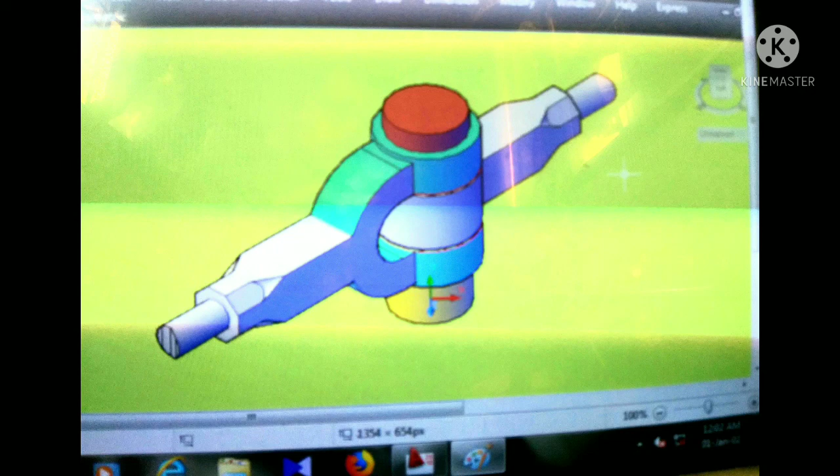Today we discuss how to design a knuckle joint. First, we will learn the shape of a knuckle joint and its uses, then we discuss how to design it.

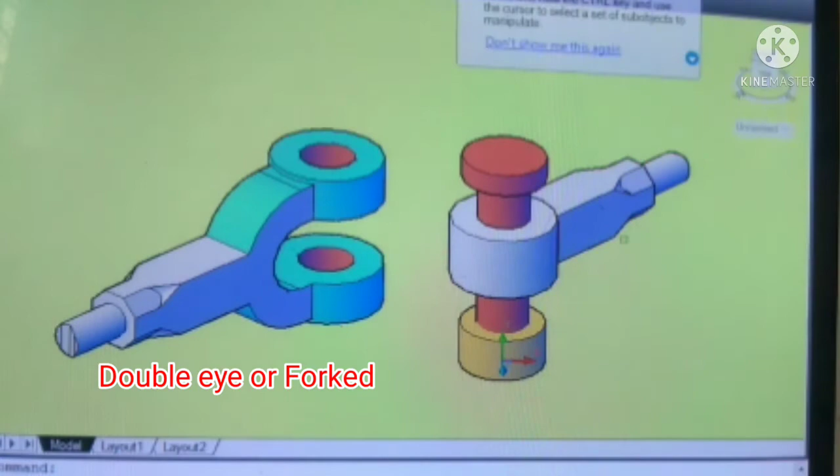Here are the different parts of a knuckle joint, and first we will study the parts individually. There are three main parts of a knuckle joint. This part is called double eye or forked, number two is called single eye or rod, and the rest part is the knuckle pin. The knuckle pin is attached with a collar called the knuckle pin collar.

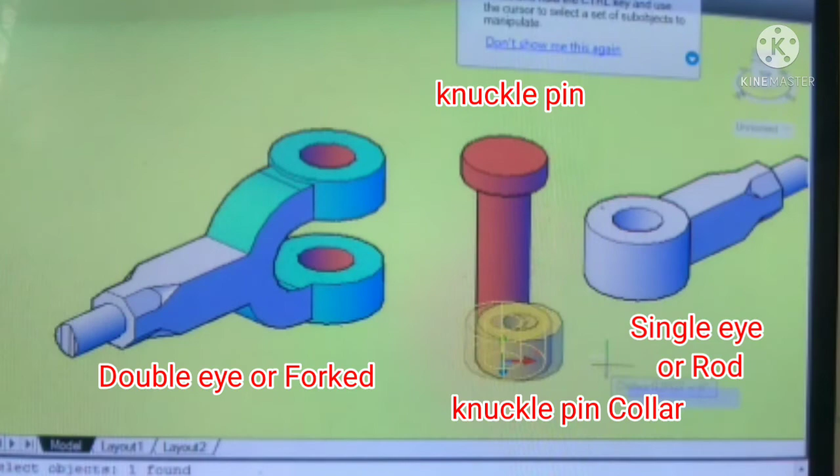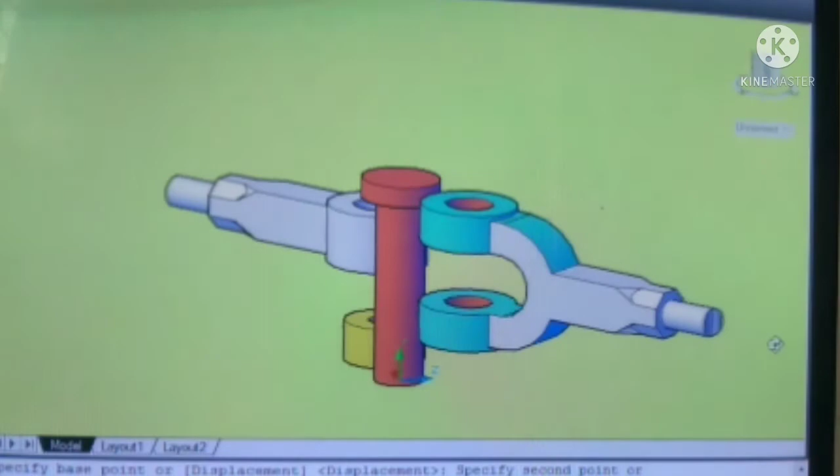Now we will look at the different parts from different angles, and again we assemble them together.

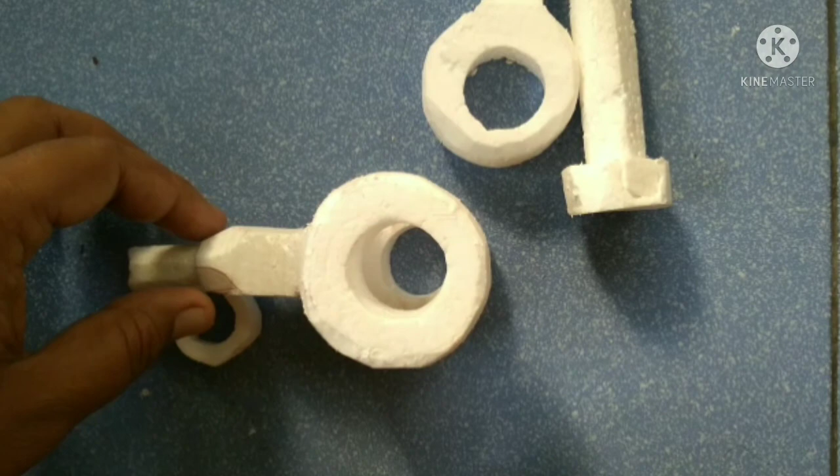Here I have made a model of a knuckle joint with thermocol for better understanding. This is the double eye or forked part, and this is the single eye or rod.

The single eye is inserted between the double eye so that all three holes are concentric, and the knuckle pin is used to secure the components. The knuckle pin collar is used to fix the joint.

Here we see the parts rotate in only one direction or one plane while transmitting tensile loads. Actually, a knuckle joint is a type of pin joint that is used to transmit tension loads while allowing rotation in only one plane.

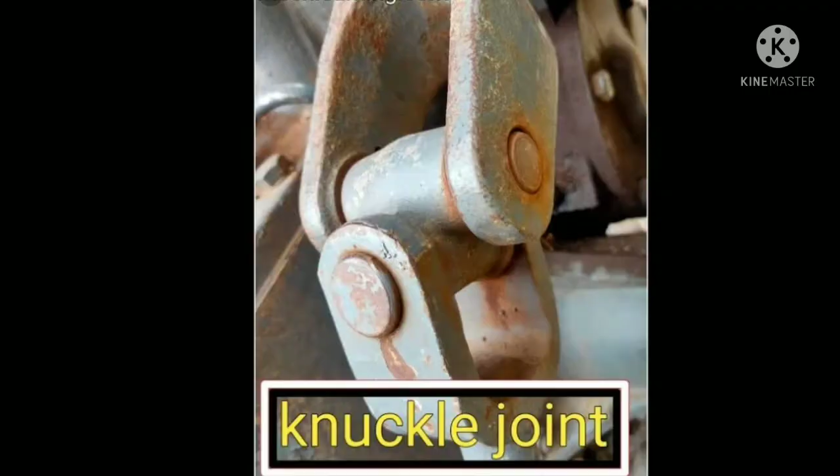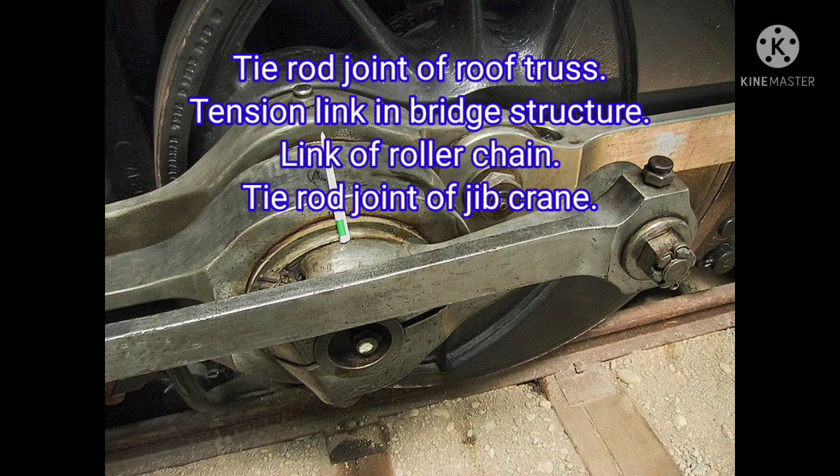Knuckle joints are often used to connect rods subjected to tension in structures, such as tie rod joints of roof truss, tension links in bridge structures, links of roller chain, rod joints of jib crane, and most commonly used in knuckle joints in tractors and connecting rods between locomotive wheels.

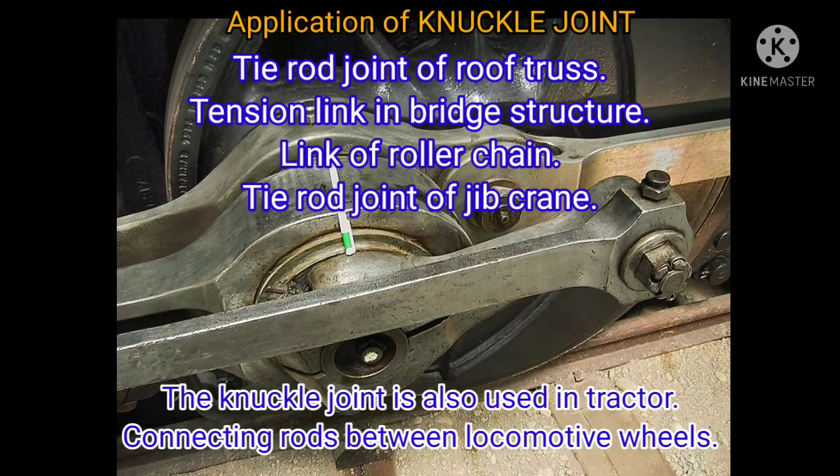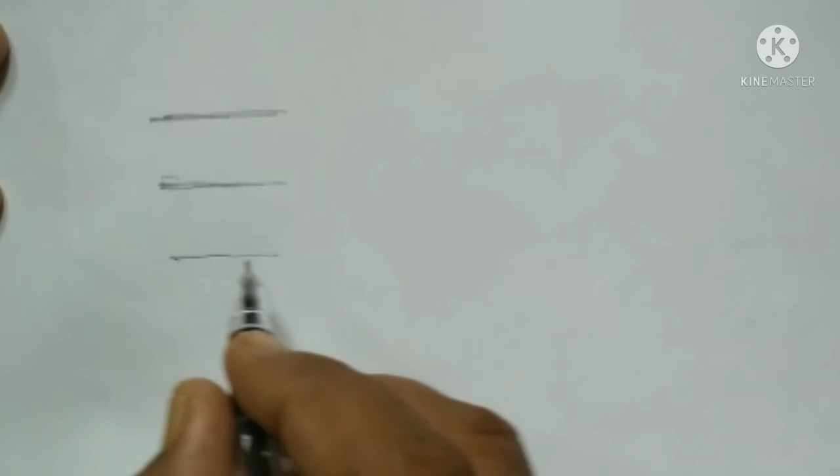We will go directly to the design part. First, we will draw a freehand sketch of the knuckle joint. By dividing into three equal distances roughly, we will draw three horizontal lines.

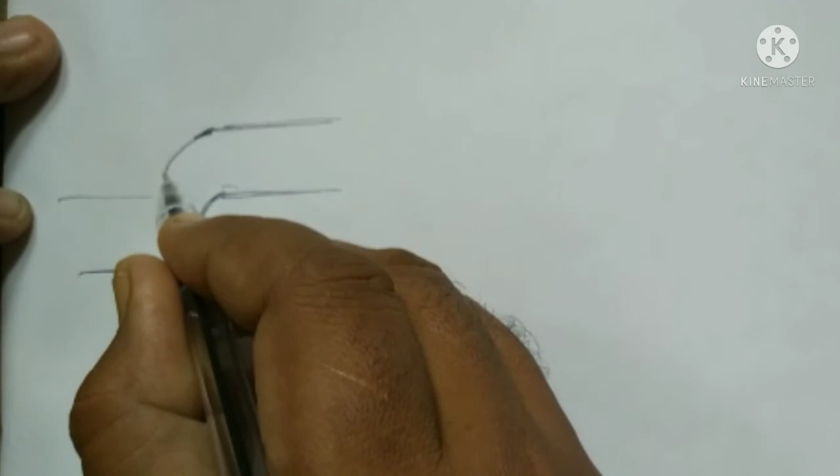Then we will try to draw the double eye or fork part. In this middle empty space, we will draw the single eye end part of the rod. Then we will draw the rest part of the fork. Later, I will discuss briefly how to draw this portion of the fork.

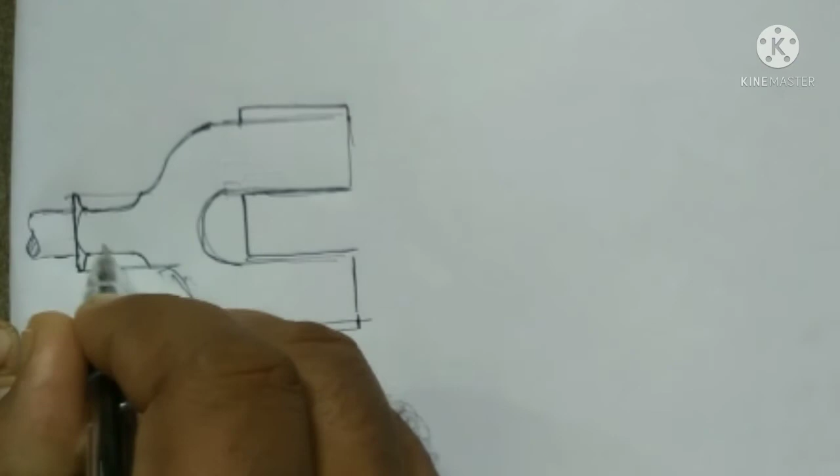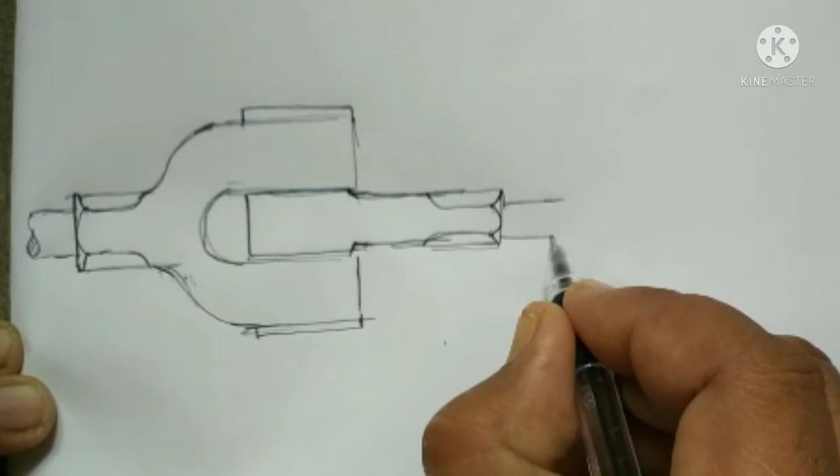Then we will draw the rod or single eye part. This portion will be the same as the fork part. Then we will draw the knuckle pin as it is inserted into the eye of the fork or rod. The line will be hidden, meaning a dash line.

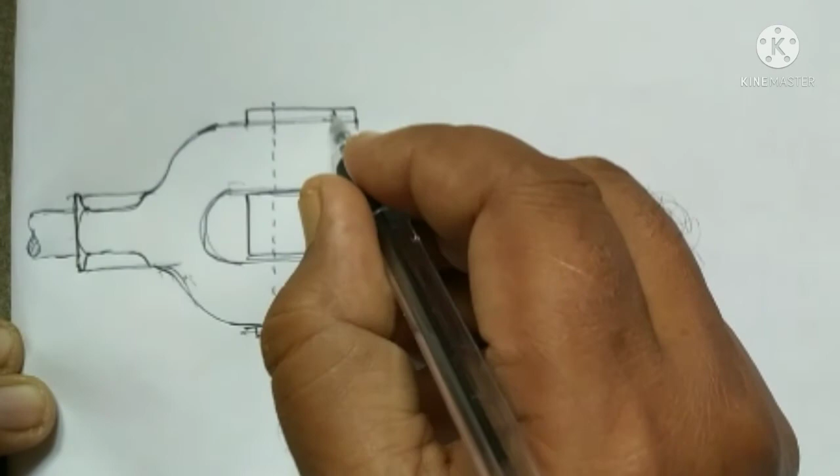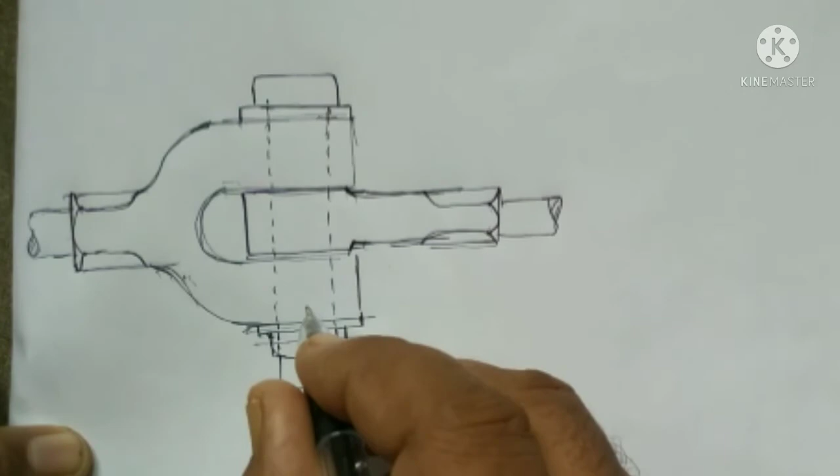Now we will draw the head of the knuckle pin, and next the collar of the knuckle pin. We can see here it will be the same and equal to the head of the knuckle pin. Now we'll draw the rest part of the knuckle pin, and you can see here in the front view it can be seen, so it will be a firm line.

P is the tensile load acting on the rod. For the rod of the fork part it will be the same but opposite in direction. Now we will give the dimensions.

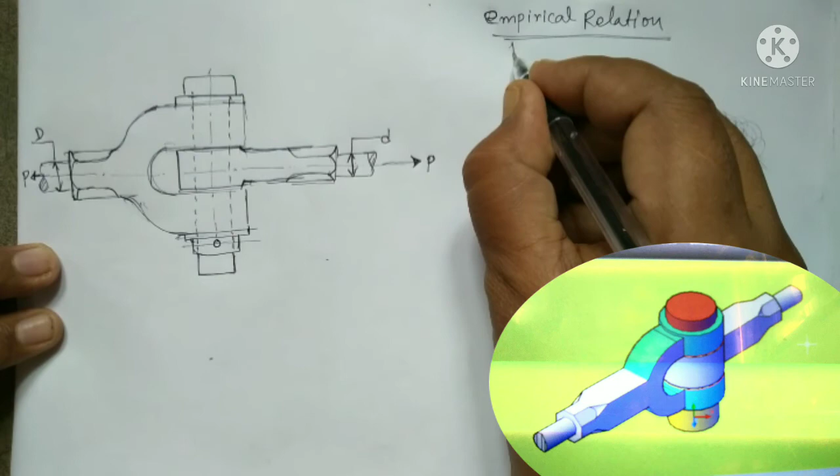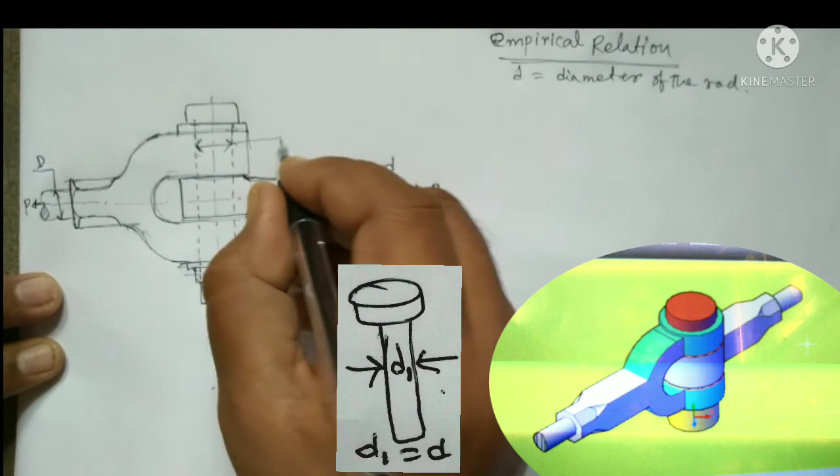D is the diameter of the rod, both rods. Now we will write the empirical relations at a time. D is the diameter of the rod or fork part, both are same. D1 is the diameter of the pin and it is equal to D, meaning the diameter of the pin and diameter of the rod will be the same in dimension.

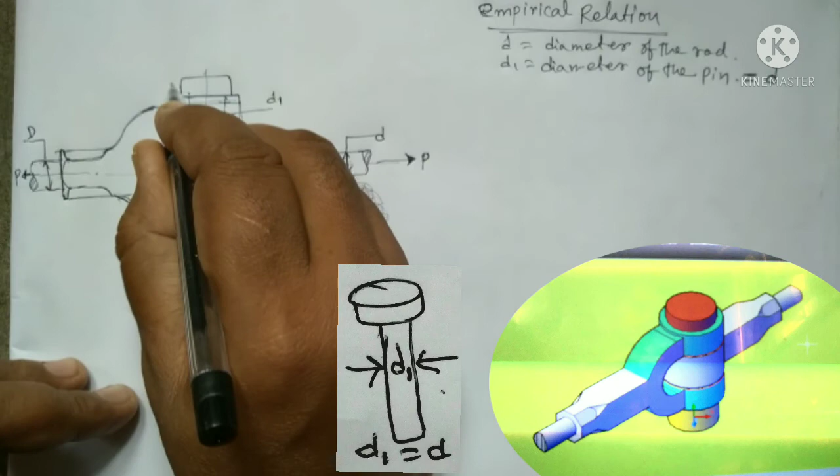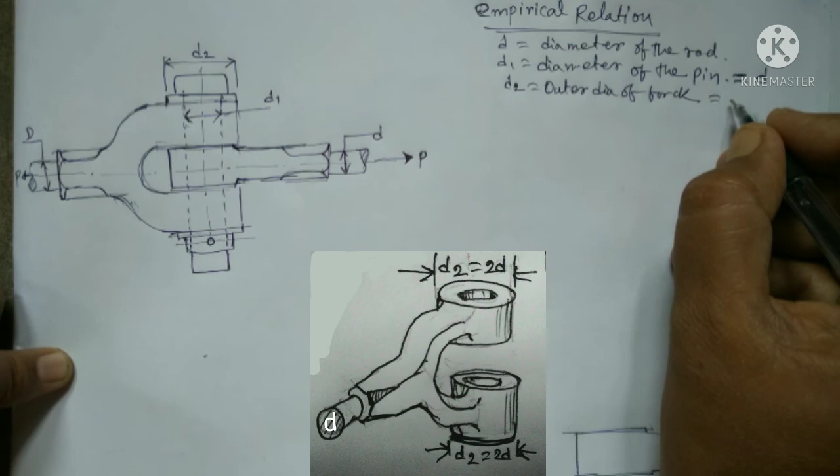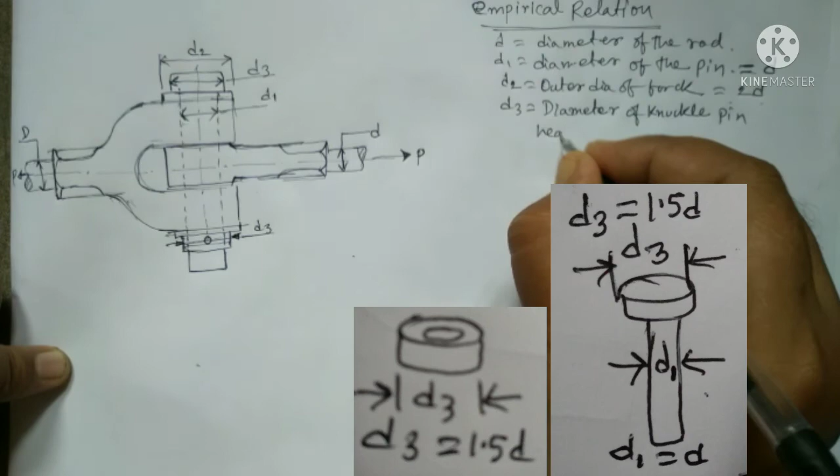D2 is the outer diameter of the fork and it is equal to 2D. This is the diameter of the knuckle pin head and collar, which is denoted by D3, and D3 is equal to 1.5D.

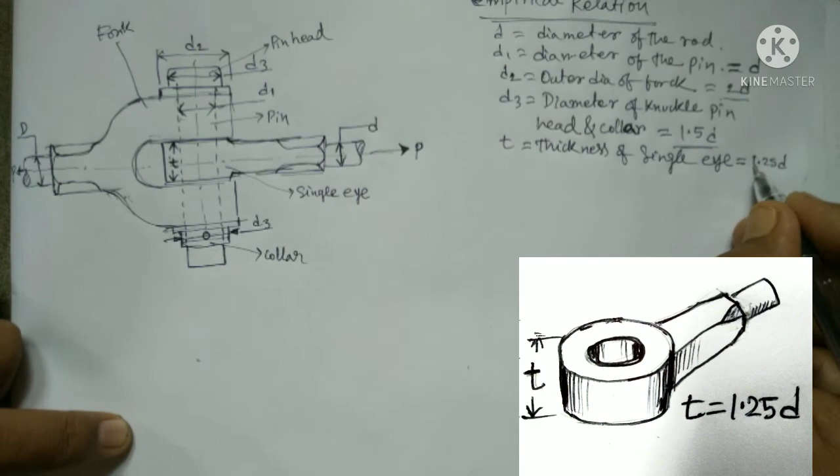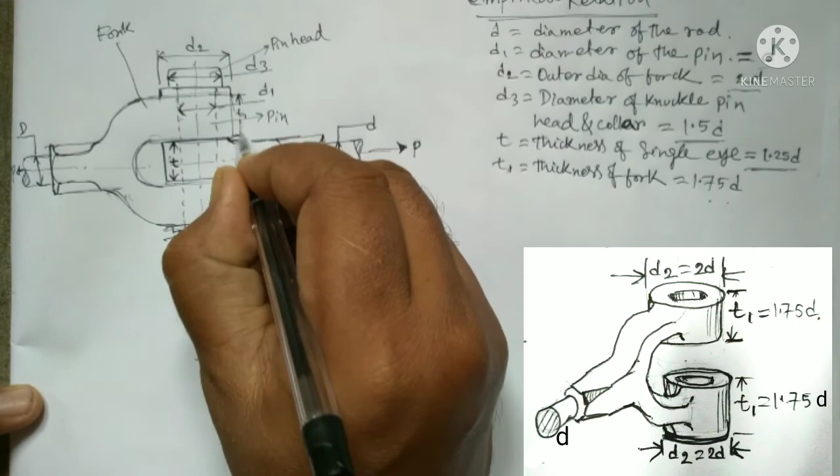T is the thickness of the single eye, and which is equal to 1.25D. T1 is the thickness of the fork, and which is equal to 1.75D. T2 is the thickness of the pin head and also the collar, and which is equal to 0.5D.

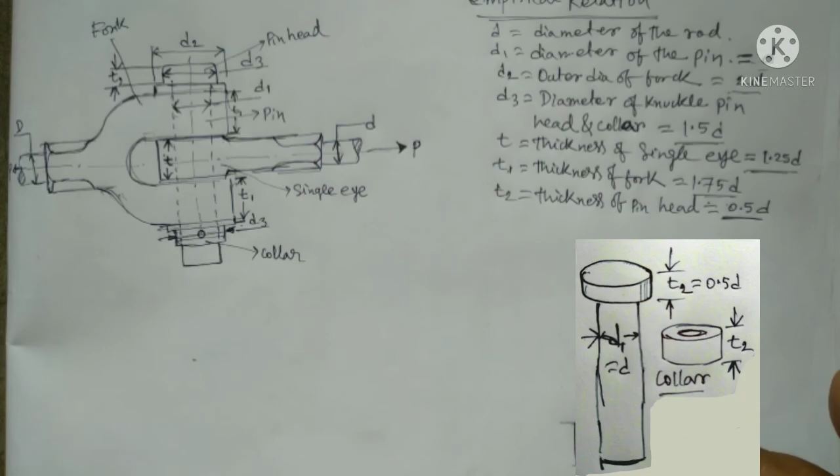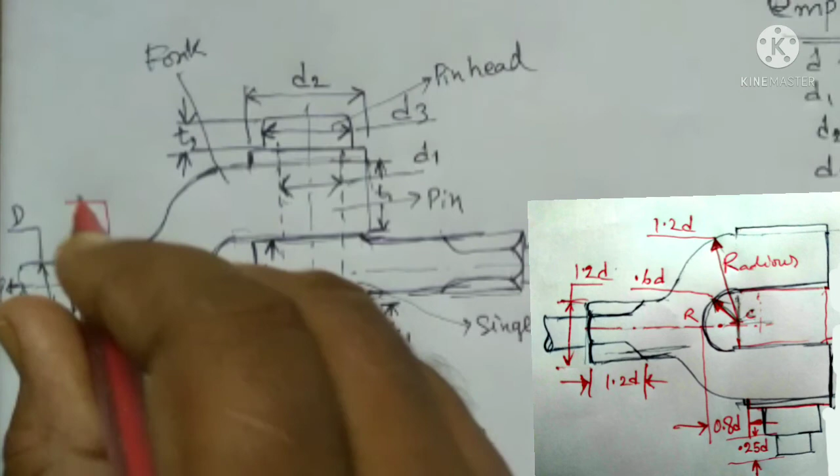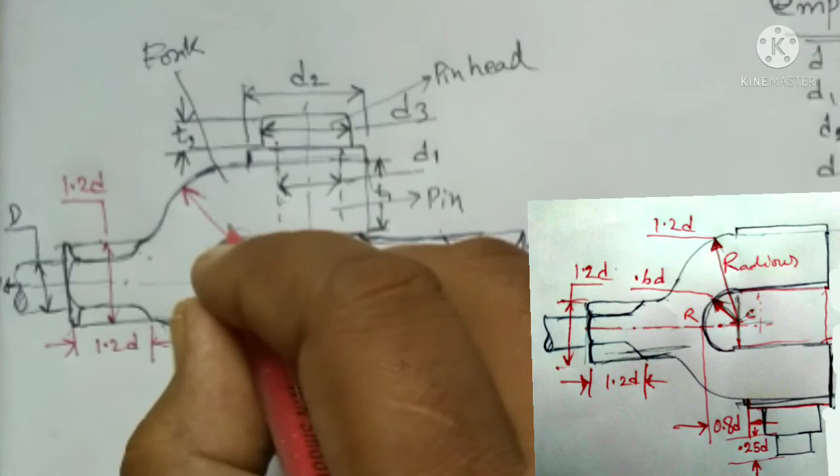There are some empirical relations which help to draw the fork and rod part. Diameter of this portion of the fork is 1.2D, and the length of the chamfering distance in this portion is also 1.2D. The inner radius of this portion of the fork is 0.6D, and the outer radius is 1.2D. The measurement of this portion is 0.8D.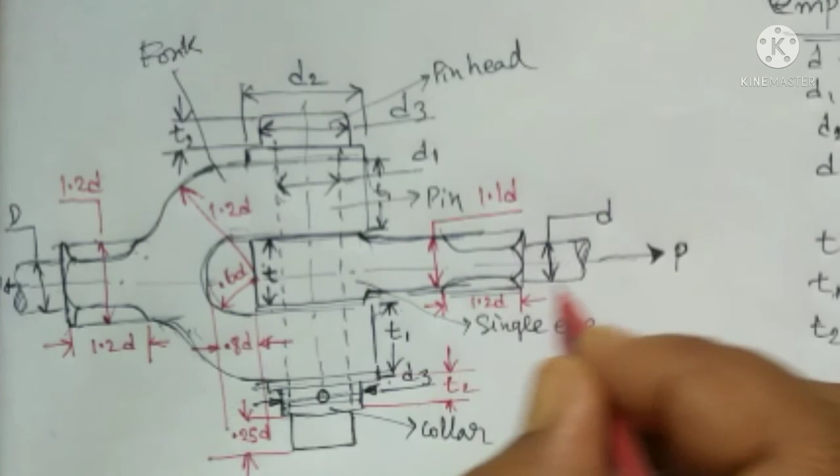The rest part of the pin from the collar head is 0.25D. For the rod part, in this position, the thickness is 1.1D, and the length of the tapering distance is 1.2D for the single eye or rod part.

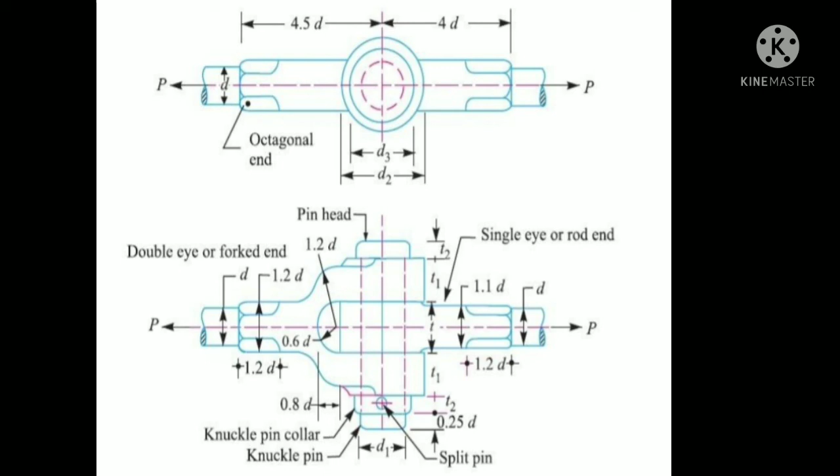This is how we draw the freehand drawing, and also the empirical relations. Study this drawing thoroughly; the top view is also shown here on the upper part of this drawing. Before starting any design, you have to practice the freehand sketch and remember the empirical relations.

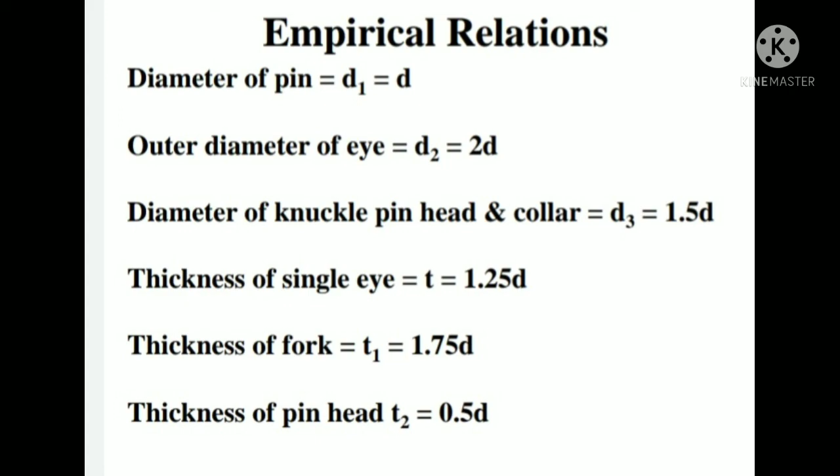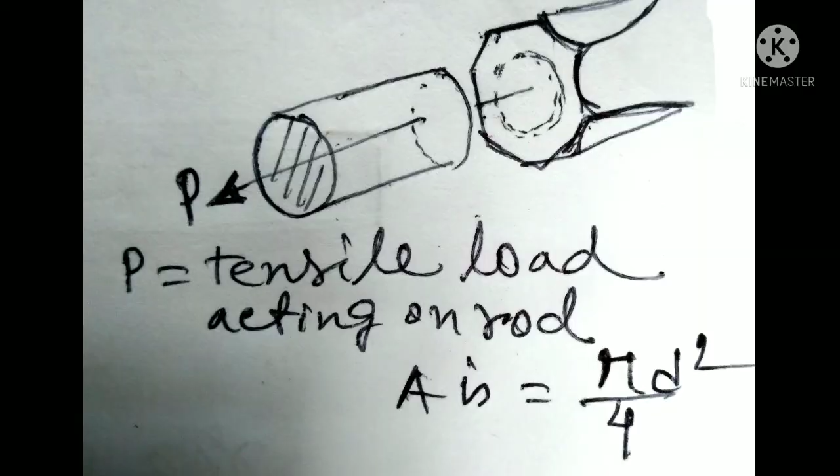First of all, we have to calculate the failure of rod in tension. If P is the tensile load applying on rod and sigma T is the tensile stress, area is pi by 4 d square, and as we know stress is load per area, so sigma T will be equal to P by pi by 4 d square, and from this equation d is obtained.

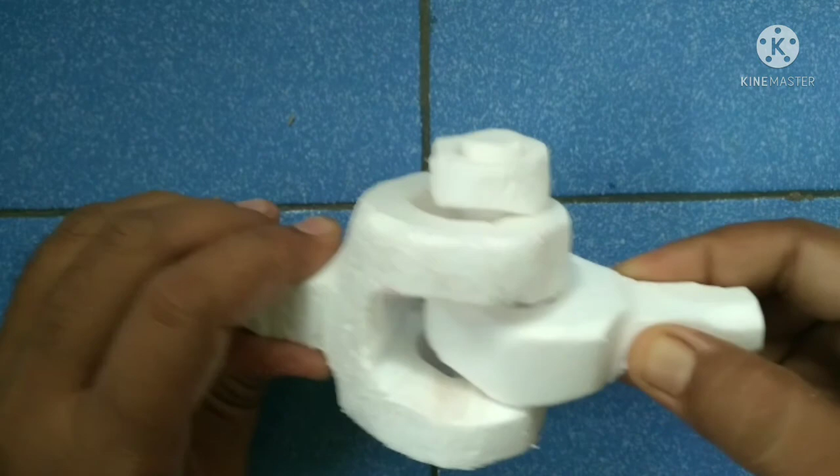For applying the load on knuckle pin, it can be broken due to shear stress. Here we can see that knuckle pin will be divided into 3 sections for shear stress, because for fork and rod shear stress will generate in two areas. That means double shear will be generated, and we have to calculate this total area.

First of all, we have to calculate the area, because throughout the design this is very important to calculate the area, because once the area calculation is done, we will be able to calculate the design easily. Here we can see the area is pi by 4 d1 square, where d1 is the diameter of knuckle pin, and because of the same area we have to multiply by 2.

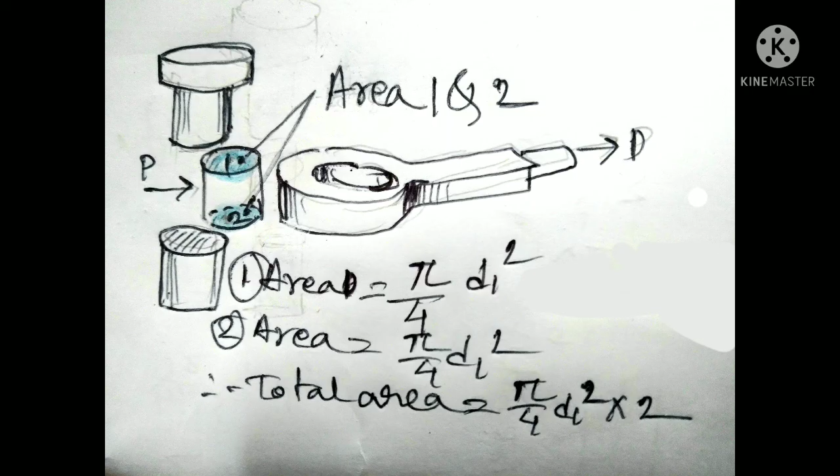Now we will design the knuckle pin, and to design it we have to consider the failure. This failure is divided into two parts. One is failure of knuckle pin in double shear, where tau s is the shear stress, and tau s is equal to P by A.

So tau s is equal to P by pi by 4 d1 square into 2 for double area. And from this equation, diameter of knuckle pin d1 is obtained.

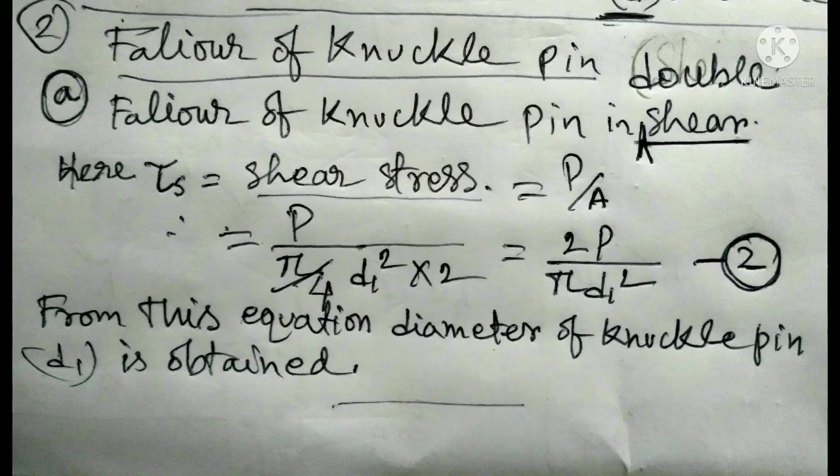For the bending failure of knuckle pin, we have to draw the bending moment diagram. So we know that T1 is the thickness of fork eye and T is the thickness of single eye.

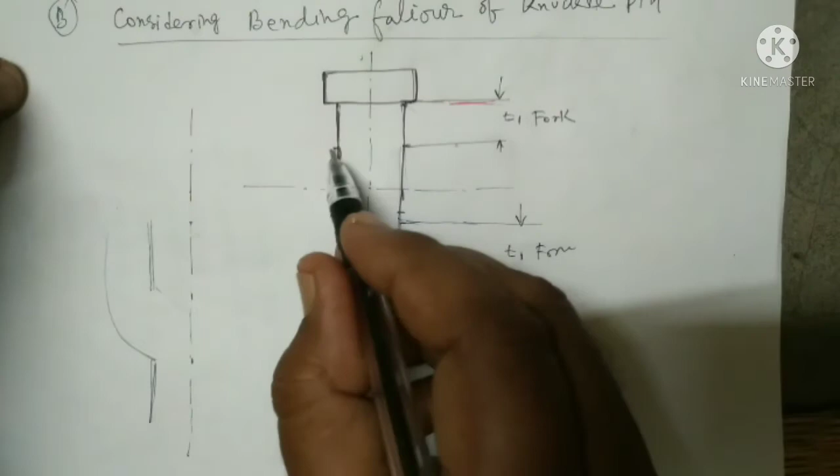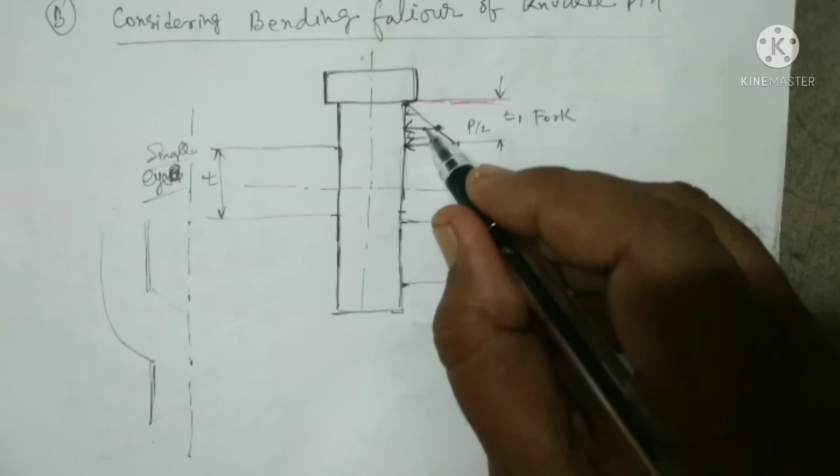For the double eye, here the load P will be divided by half, that means P by 2. It will act in this direction, and at the extreme end it will be 0, and then gradually increase, generating a triangle. We know the centroid of a triangle is height by 3.

So here will be t1 by 3. It will be similar to the opposite part, so this length will be t1 by 3.

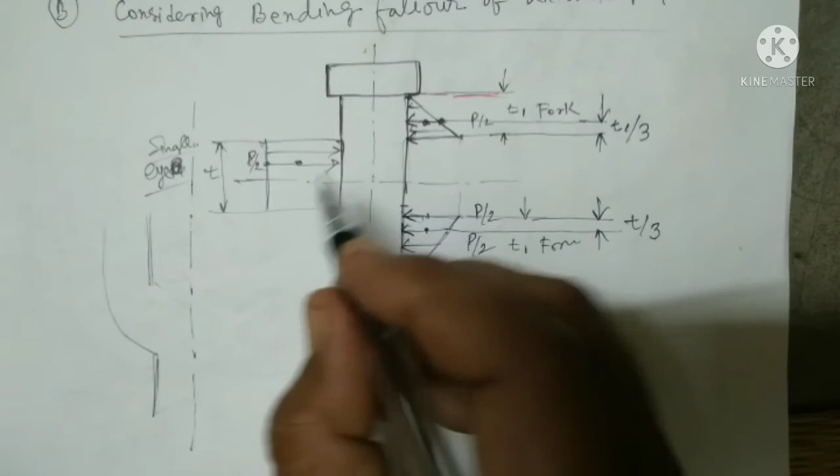Now we have to draw the other side for the single eye part. As here P by 2 load is applying equally, this diagram will be a rectangular shape. Here we can see that the centroid along the y-axis will be t by 4.

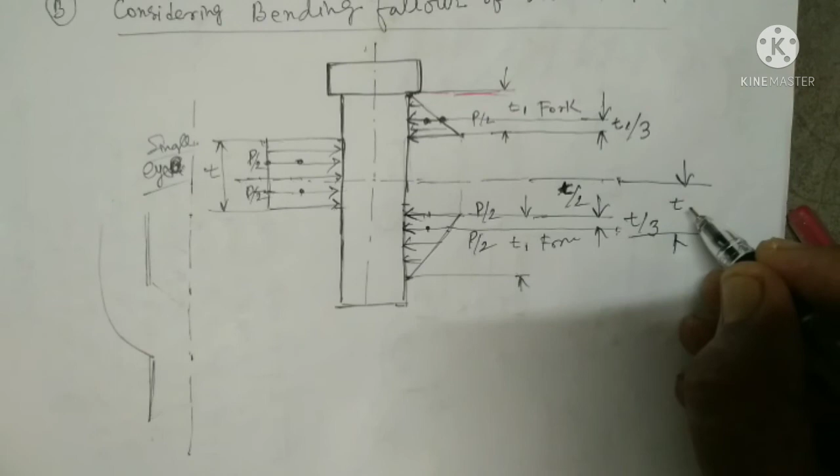We see here this distance is t by 2. So the total distance will be t by 2 plus t1 by 3.

Now we calculate the bending moment. Here we see that for this portion bending moment will be t by 2 plus t1 by 3 into P by 2.

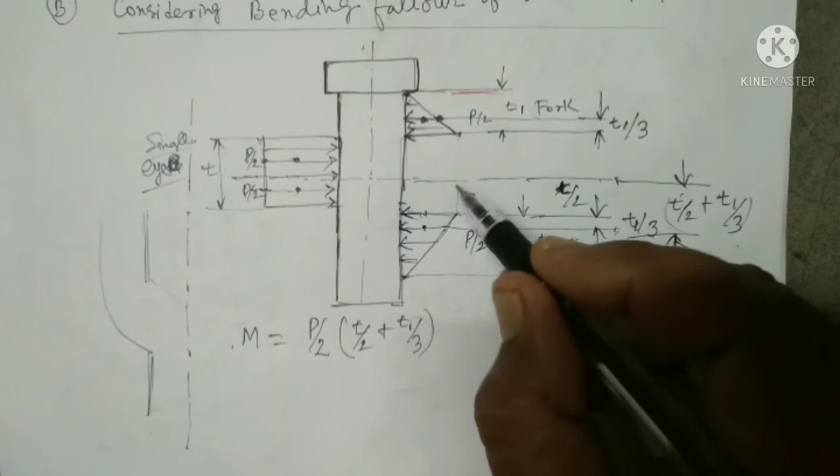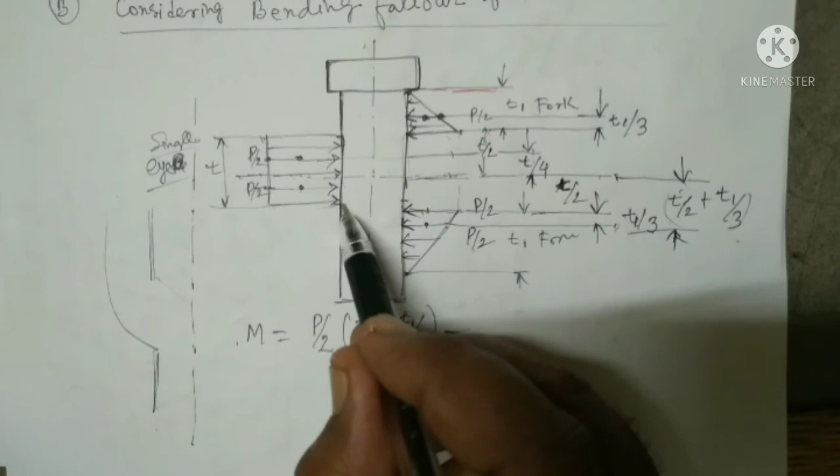We see here the centroid along the y-axis will be t by 4. As the load is acting in opposite direction, it will be minus P by 2 into t by 4.

From this equation we get the final bending moment is t by 4 plus t1 by 3 into P by 2.

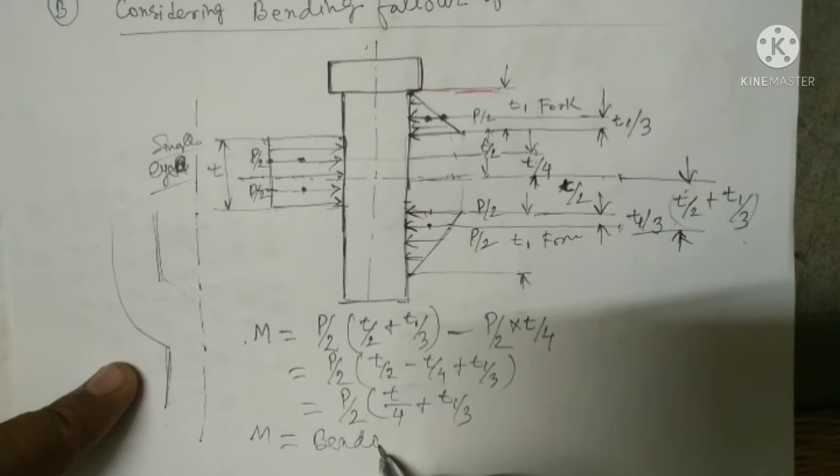We know from the bending equation that bending stress is equal to M by Z, where M is the bending moment and sigma b is the bending stress and Z is the section modulus, and Z is equal to I by y. For the circular cross section, I is equal to pi by 64 into d1 to the power 4, and y is d1 by 2. So Z will be pi by 32 into d1 cube.

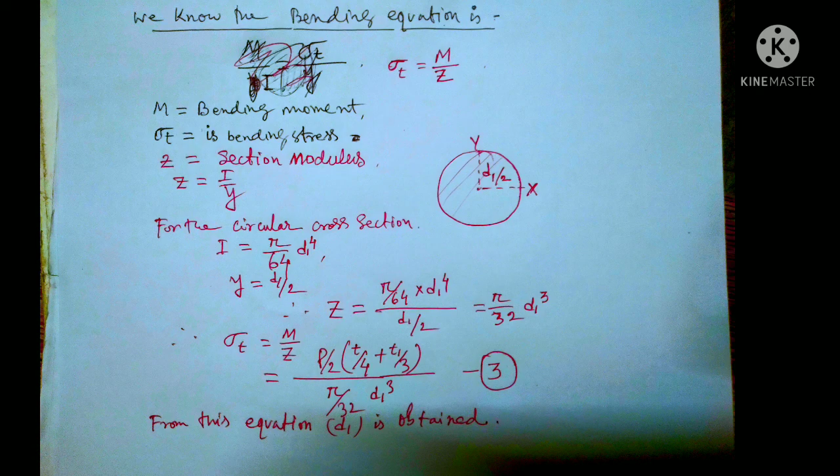From here we can also see that sigma t is equal to M by Z. That means t by 4 plus t1 by 3 into P by 2, divided by pi by 32 into d1 cube. From this equation d1 is obtained, and we can cross check the dimension of d1.

We will study thoroughly the bending failure of knuckle pin once again.

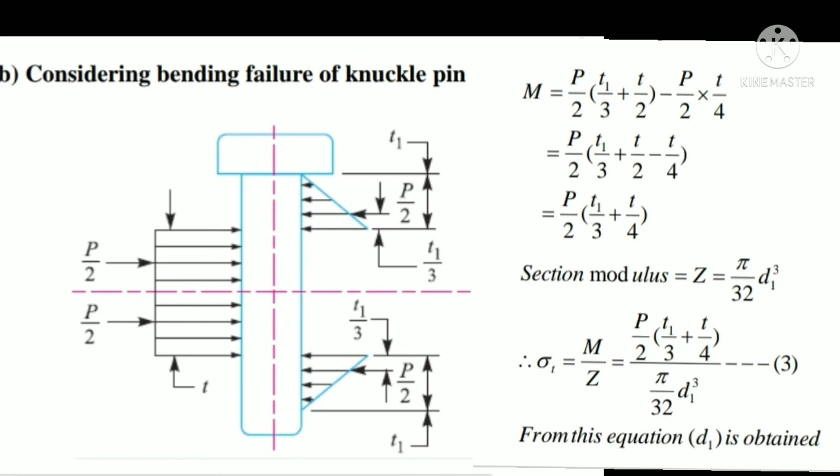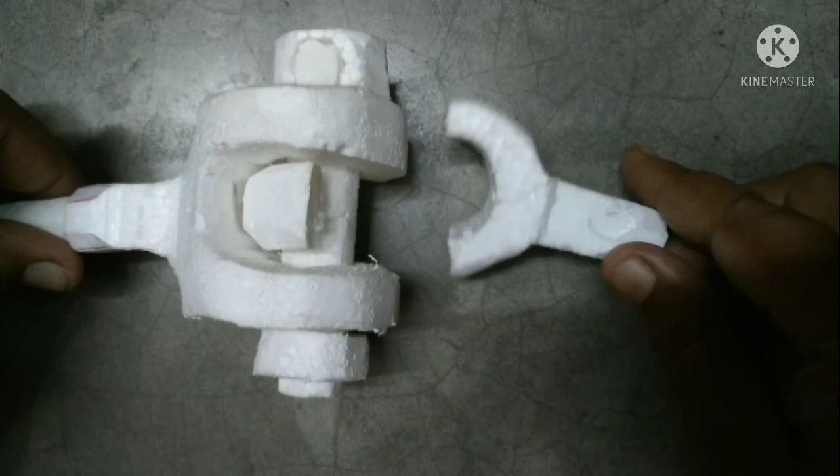Now we will design the single eye or rod part. Here we calculate the single eye end in tension. If we apply the tensile load on rod, it can break from this place. So we have to calculate these two areas that are broken from this portion.

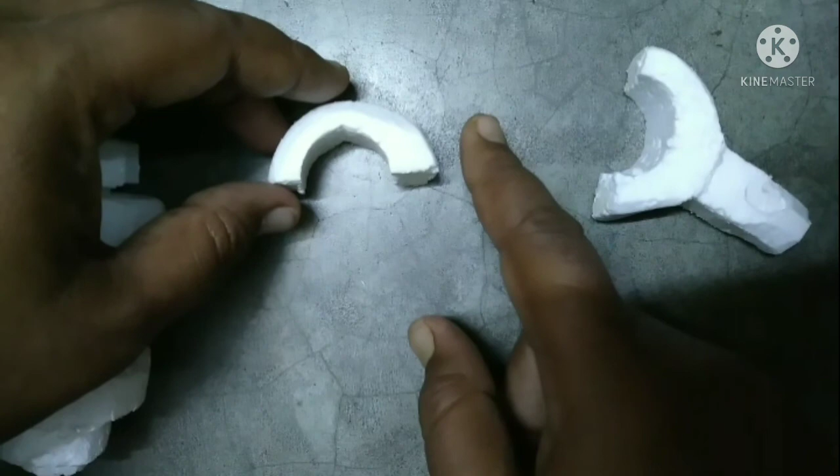Also we may calculate these two areas instead of other parts. Both will be the same.

Suppose we consider the length of this one area as x, so we can see here x plus d1 plus x is equal to d2. So 2x is equal to d2 minus d1, and the total area is 2x into t, that means d2 minus d1 into t.

Considering the tensile failure of single eye end, we can write that sigma t is equal to P by d2 minus d1 into t, where sigma t is the tensile stress and A is the total area, that means d2 minus d1 into t. And from this equation, sigma t for the single eye end may be checked.

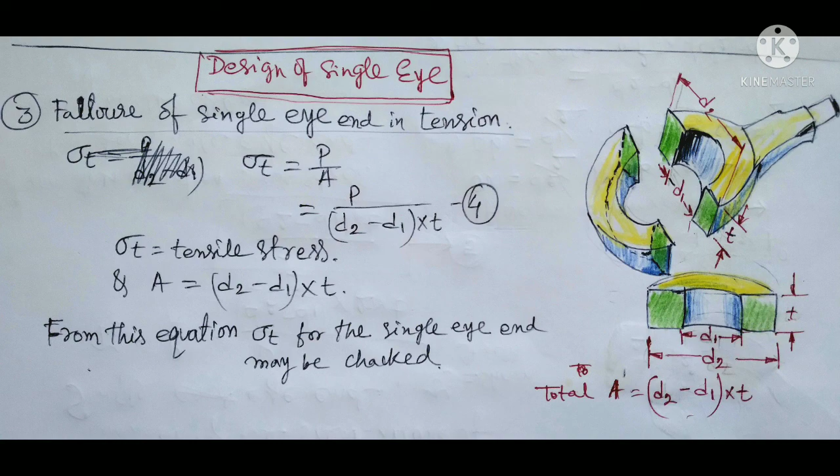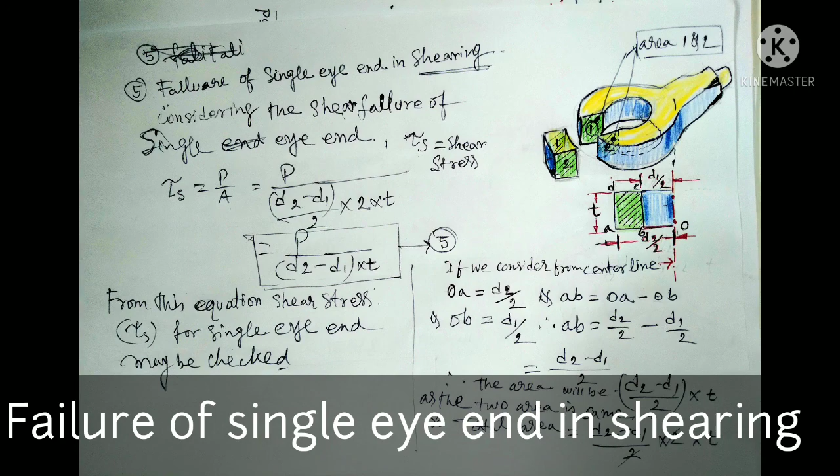Now we calculate the failure of single eye end in shearing. If we apply the tensile load on rod, due to the shear stress between knuckle pin and single eye end, it can be broken from this place.

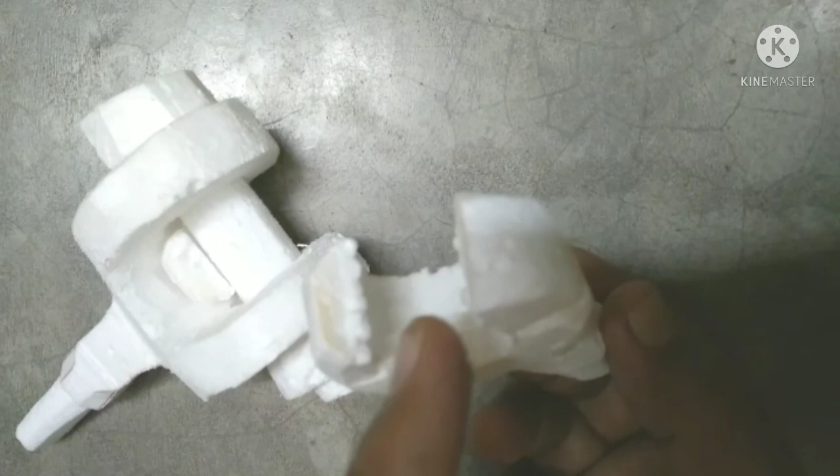So we have to calculate these two areas for shear stress. Also, we may calculate these two areas instead of the other part. Both will be the same.

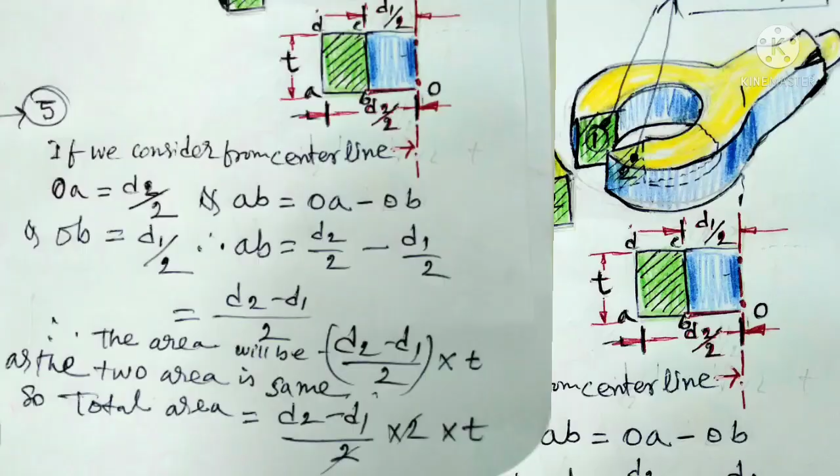If we consider the dimension from center line and name the area ABCD, we can see here that OA is equal to D2 by 2, and AB is equal to OA minus OB. And we know that OB is D1 by 2. So AB is equal to D2 by 2 minus D1 by 2, that means D2 minus D1 by 2, and the area will be D2 minus D1 by 2 into T. As the two areas are same, the total area will be D2 minus D1 into T.

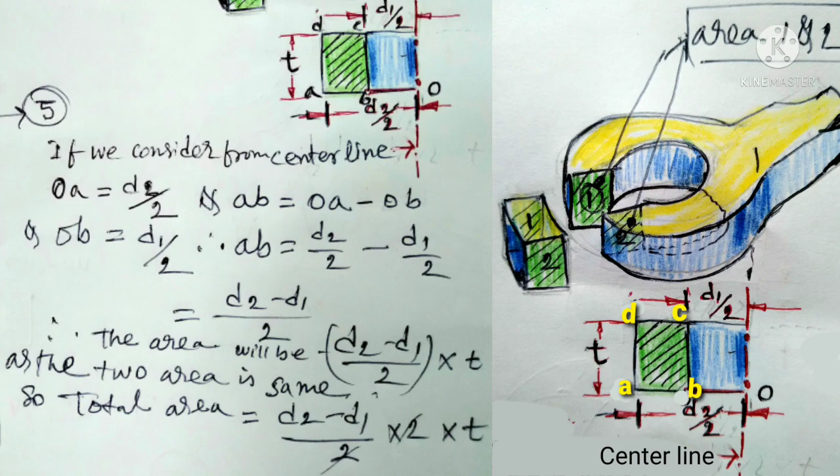Considering the shear failure of a single eye end, tau s is equal to P by D2 minus D1 into T, where tau s is shear stress and A is total area, that means D2 minus D1 into T. From this equation, shear stress for single eye end may be checked.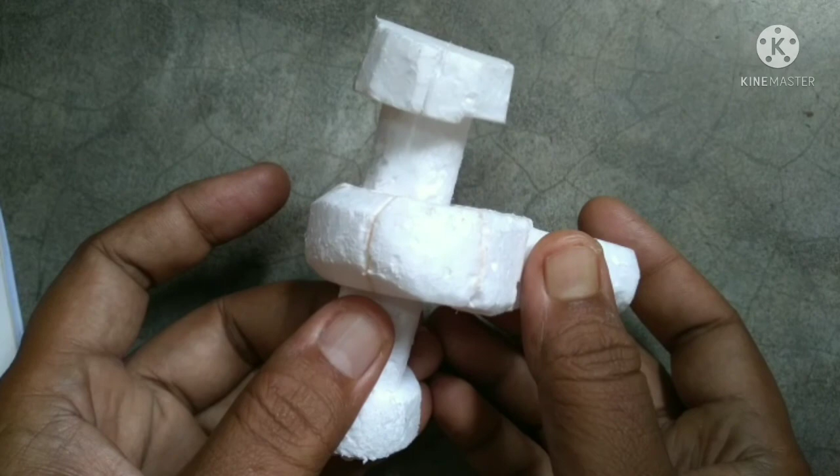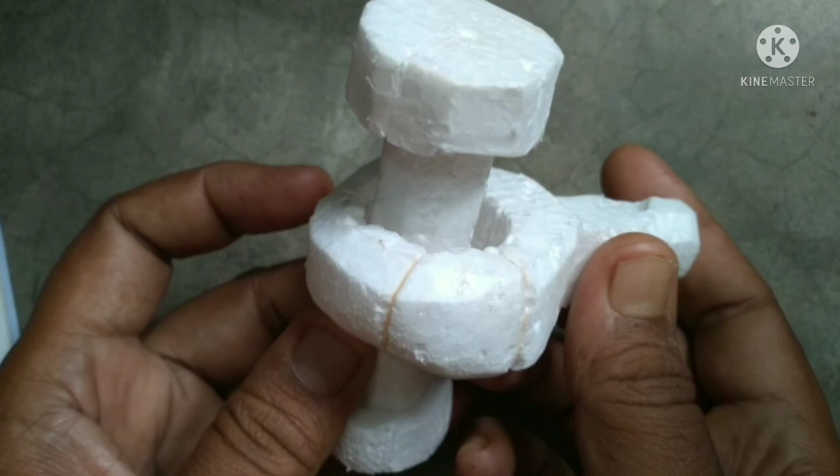Now we calculate the failure of single eye end in crushing. Here we see that this portion of pin is inserted in the eye part, which is subjected to the circumferential compressive stress at the area of contact between the pin and single eye. And if the load P is applying on the single eye, there will be generated a crushing stress. So we have to calculate the area of contact between the single eye and knuckle pin.

Study this figure thoroughly. First of all, where is crushing stress generated. From here we can see that area of contact between the pin and single eye end, that is A, is equal to D1 into T. Considering the crushing failure of single eye end, sigma cr is equal to P by D1 into T. And from this equation, crushing stress sigma cr may be checked.

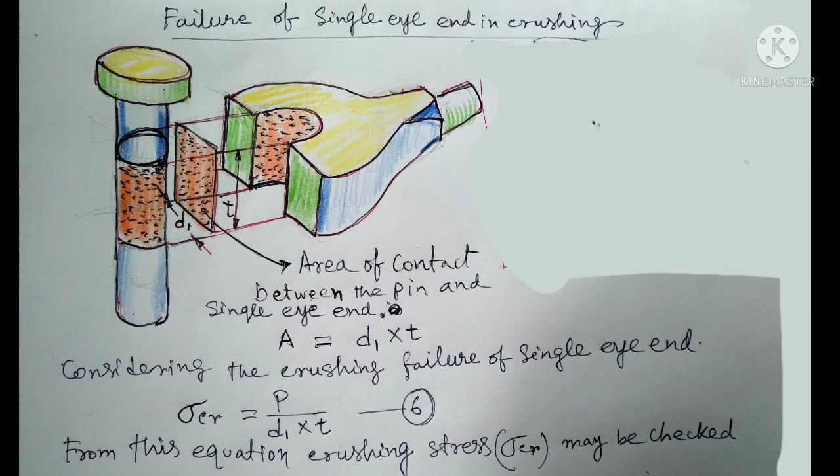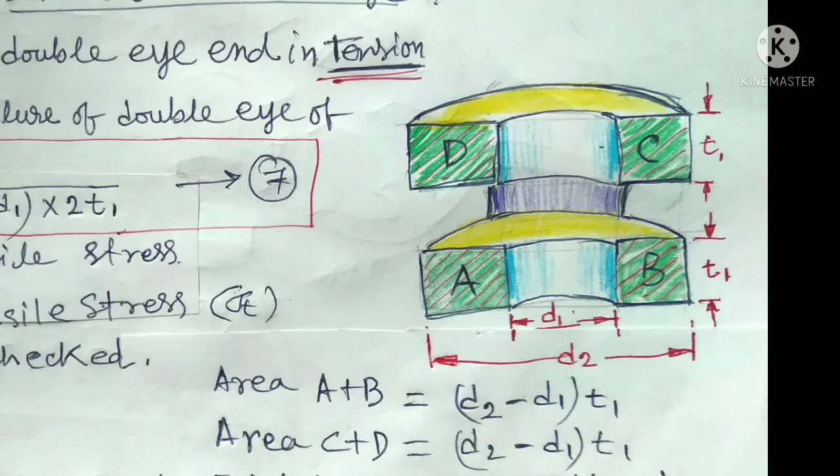If we apply tensile load on the fork part, we know that the weak part is broken first. So it can be broken from this place due to the generated tensile stress.

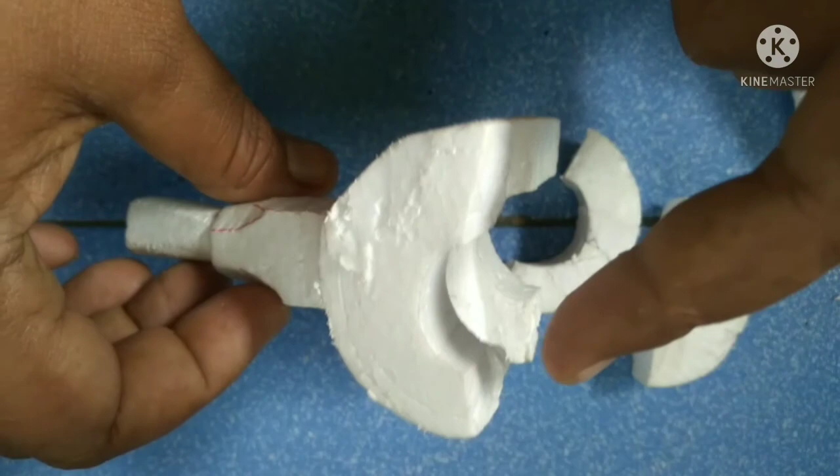So we have to calculate this 4 area that is broken from this portion for the tensile stress. Here first of all we have to calculate the area. So the area A plus B is equal to d2 minus d1 into t, and similarly the area C plus D is equal to d2 minus d1 into t. So the total area A plus B plus C plus D is equal to d2 minus d1 into 2t.

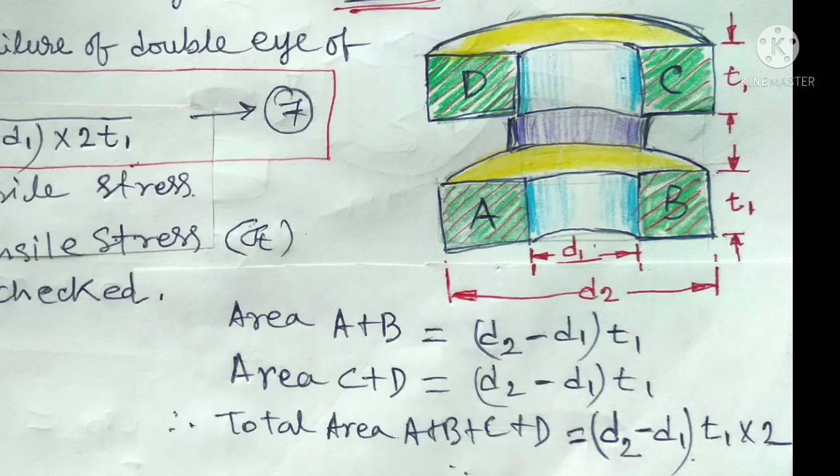Considering the tensile failure of double eye of forked end, sigma t is equal to P by d2 minus d1 into 2 t1, where sigma t is tensile stress. From this equation, tensile stress sigma t of fork may be checked.

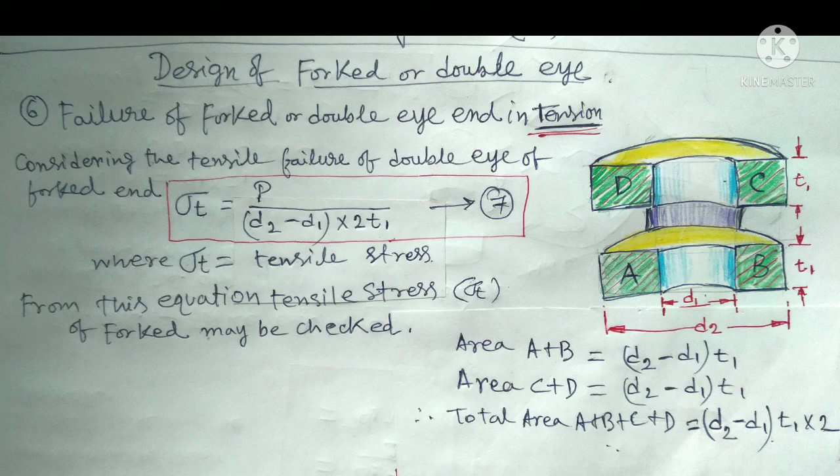For applying the load on fork end, it can be broken in this place due to generating shear stress between the double eye and knuckle pin. So we have to calculate this 4 area for shear stress.

First of all, we have to calculate the area for shear stress, and here we will calculate all dimensions from the center line. So the outer dimension will be d2 by 2 and inner dimension will be d1 by 2, and the thickness is t1. So the area of A is d2 minus d1 by 2 into t1, and the total area A plus B plus C plus D is equal to d2 minus d1 by 2 into 4 t1. Finally we get d2 minus d1 into 2 t1.

Considering the shear failure of double eye of fork end, tau s is equal to P by d2 minus d1 into 2 t1, and from this equation shear failure of fork may be checked.

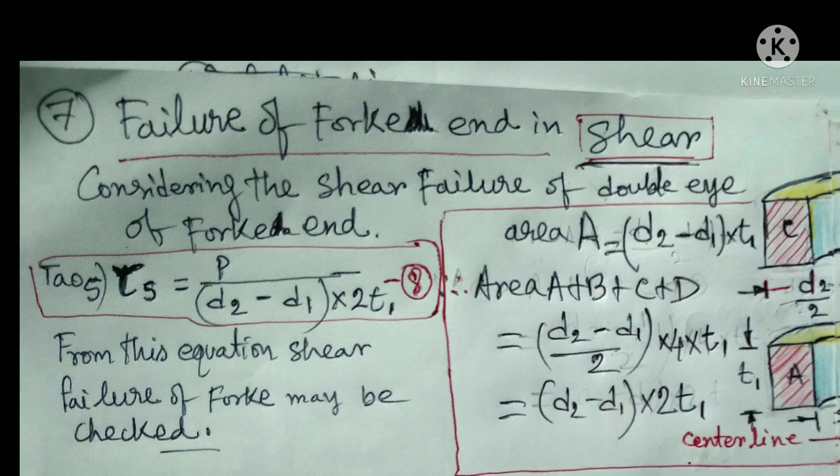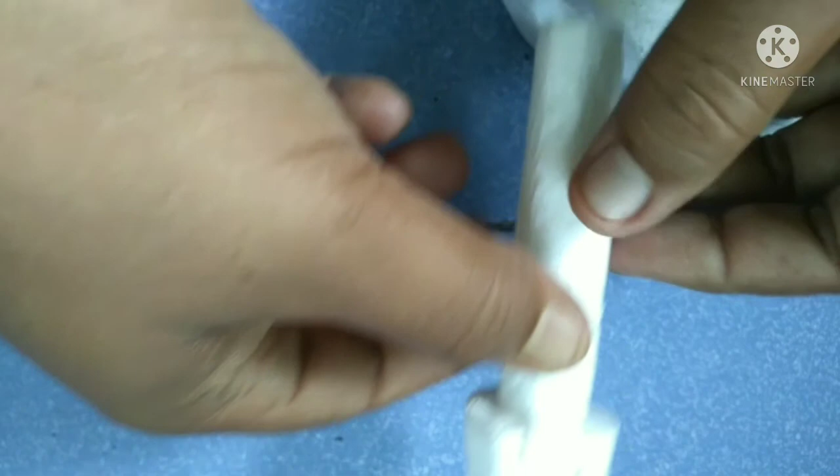Here we see that if the load P is applying on the fork part, there will be generated crushing stress between the fork end and the knuckle pin. And we also see here these two portions of knuckle pin which are inserted into the double eye part and subjected to the circumferential compressive stress at the area of contact between the double eye and the knuckle pin. So we have to calculate the area of contact.

Here we see that for double eye we get two areas of contact, one is capital A and another is capital B, and the area of contact between knuckle pin and fork, A, is d1 into t1, so for A plus B the total area will be 2 into d1 into t1.

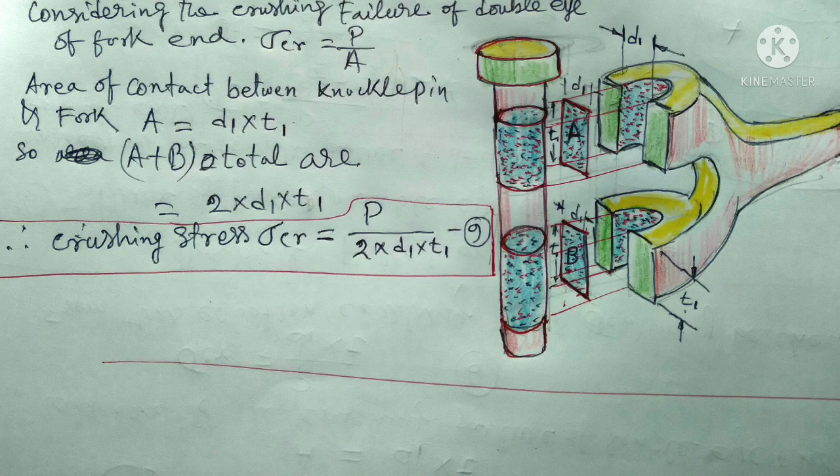So the crushing stress sigma CR is equal to P by 2 d1 t1, and from this equation crushing failure of fork may be obtained.